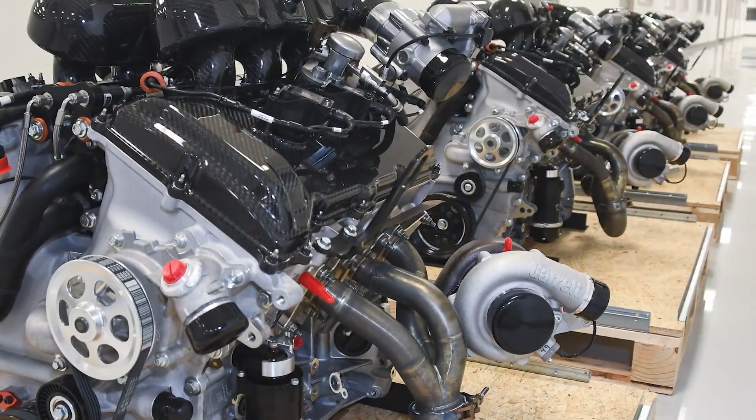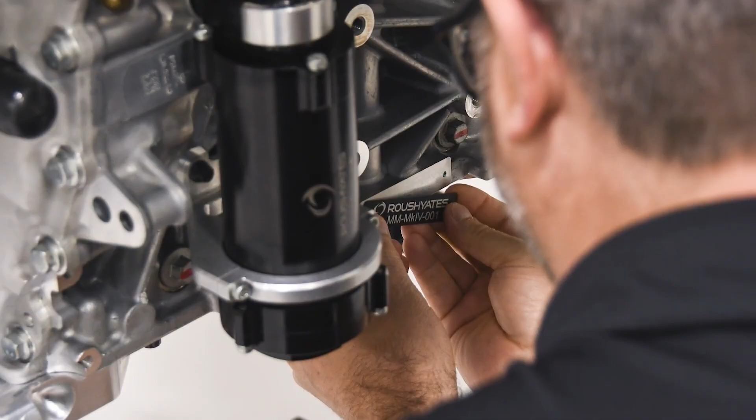Good afternoon, or good morning for some of you. My name is Todd English. I'm going to run us through the company history at Roush Yates Engines, then I'll turn it over to Jamie McNaughton. We have been partners with CONVERGE CFD software since 2016.

How did we get here? Prior to 2004, Jack Roush and Robert Yates had their own engine development companies, one located in North Carolina, one located in Michigan. Jack and Robert were like brothers, and they were brothers to Ford Motor Company. They wanted the resources, they wanted the allocation of technology, and they really battled each other on and off the racetrack for many years. At the end of 2003, with the leadership of Ford Motor Company, we understood that the business landscape was changing. Toyota was even coming. So with the encouragement of Ford, you had two legendary, iconic NASCAR Hall of Fame engine builders merge their operations at the end of 2003 and begin in 2004.

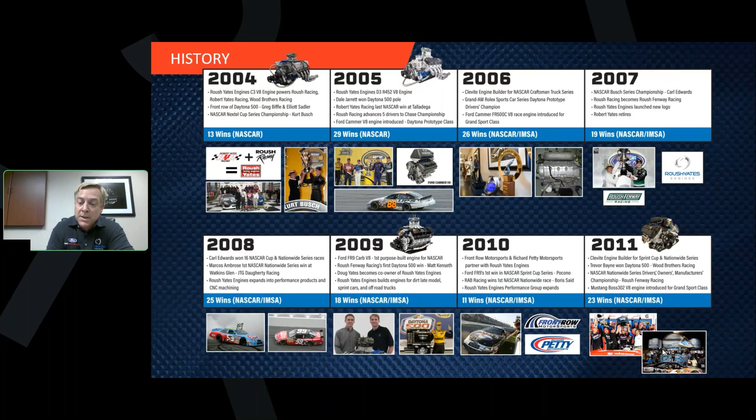When we first started the company in 2004, we had 64 employees. Today, we're about 225. Throughout the years, we started with the Cup side of the business, moved into Xfinity, moved into truck, also started building V8 engines and V6 engines for Daytona prototypes, moved into some other series. In 2010, you can see we actually started adding different teams with Front Row Motorsports and Petty in 2010 to our Cup program.

Just going through some various slides here. 2009 and 2010 was critical as well, as we introduced the Ford FR9 in 2009. That is our NASCAR Cup engine that we race today, which has obviously changed in development for many years.

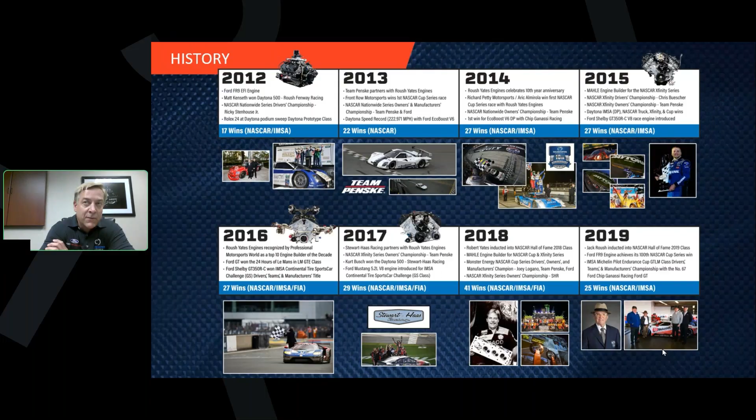Another highlight with Roush Yates Engines would be in 2016 when we partnered with Ford as well as Chip Ganassi Racing to go back and compete on one of the iconic racetracks in racing, which is Le Mans. So being able to showcase to this community, we do have various engine platforms and programs. A lot of that is dependent on Ford Motor Company and the direction that they would like to race.

Here, most recently, it's been a few really good years for us on the NASCAR Cup side with the NASCAR Next Gen program. We have won the championship in the last 3 consecutive years in '22, '23, and '24, and looking forward today, we currently have 3 NASCAR race car drivers in the championship hunt.

Just high level where we're at today from a Roush Yates Engine perspective, we do count the number of wins. You can see the NASCAR Cup Series, Xfinity, Craftsman. You can also see the WEC Series, the IMSA. Again, a long, rich history of racing in various series.

We have participated in other series such as ARCA and some other series that we do not count the wins, but again, through our long, rich development history, there's been lots of different series. I mentioned ARCA, but we also did Sprint 360s, 410s, off-road truck racing engines. So again, we have had a nice assortment of different platforms that we get to develop and test.

The vision at Roush Yates Engines is to be world-class racing engines, with a mission to design, develop, and manufacture championship engines in partnership with Ford Performance. And the core values really revolve around power, performance, and reliability.

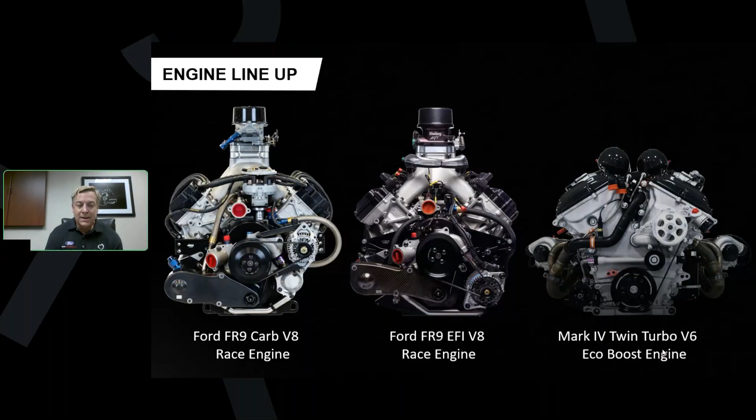Today's current lineup, that Jamie will get more details into - but today we currently race the Ford FR9 carbureted V8 in the NASCAR Xfinity Series, which has 33 races in 2025. If you look at the Ford FR9 EFI V8 engine, that engine we race in the NASCAR Cup, not only for Roush Fenway Keselowski, but we do Team Penske, Wood Brothers, Haas Factory Racing, Front Row Motorsports, and Rick Ware Racing. So there is a good amount of teams that we're powering on almost every given Sunday. And also on the Xfinity side, we do power 5 to 6 teams.

On the right-hand side is the Mark IV. We showed a little bit of this in the video itself. I'll let Jamie talk about engine development, but we did partner with Multimatic and Ford Performance on this adventure, where we leveraged the skill sets at Roush Yates Engines from design, development, and build of specialty engines in partnership with Ford Performance.

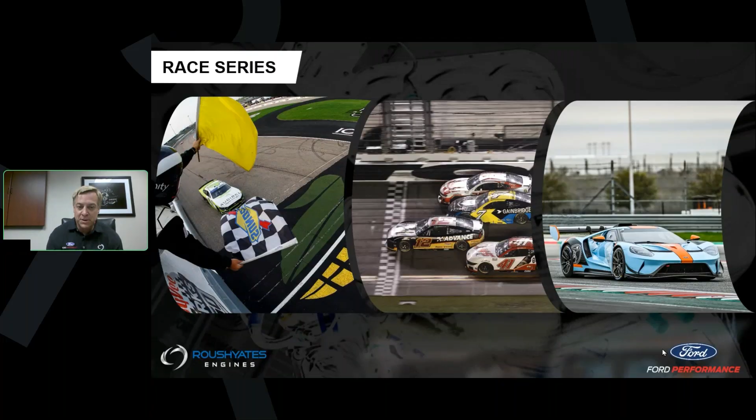Highlighting the series that we race in, starting on the left-hand side is the NASCAR Xfinity Series. The middle one is Daytona, that's the NASCAR Cup Series, winning races. It's important, but you can see how close the competition is. Then you can actually see a picture of that beautiful Mark IV car on the right-hand side.

We have 3 facilities located in Mooresville, North Carolina. The facility that we're looking at now is the NASCAR engine shop, so again, that's where all the engine design, development, and testing occurs. We do have 2 other facilities that are a support system.

We have our internal 135,000 square foot advanced manufacturing CNC facility. There, we manufacture about 60% of the internal components that go into the FR9, but we've also gone into some other areas of manufacturing and providing solutions. So not only today do we do the NASCAR engines and machine components for that, we also manufacture car components for the NASCAR Cup Series that we sell to all the teams.

And from a diversity standpoint, we have moved into various military projects. We've moved into aerospace, we moved into medical, and today we even consider space a unique category that we manufacture and provide solutions to. This is a good bird's eye view of our CNC facility.

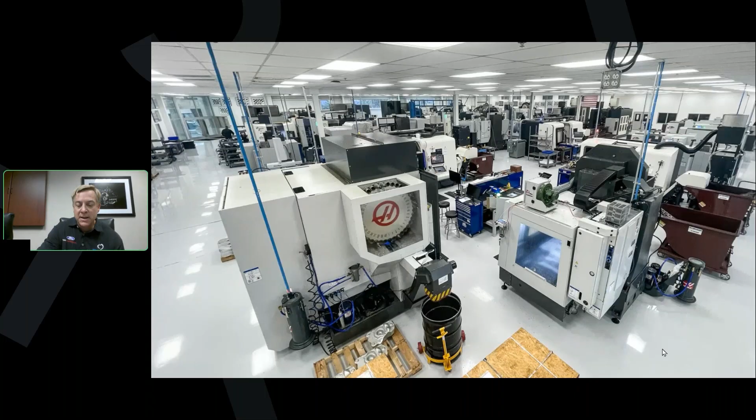Again, I think I might have mentioned, AS9100 certified, ISO 13485, 70 CNC machines. We continue to look at future investments, and future investments will be paired with some type of automation here. This is a pallet system that we have the capability of machining lights out, 36 pallet stations, tombstones there, and it's paired with 6 A61 machines.

Before I turn it over to Jamie, for us the business model really revolves around winning. Throughout our rich history we have to make the business model work, but checker flags are super important. We have over 400 checker flags located in our facility, and it's a good way for us to capture the win itself and really some great memories of the success we've had since 2004. With that, I'm going to shift to let Jamie move over and get started into a deeper dive of how we're leveraging the success of CONVERGE CFD each and every day.

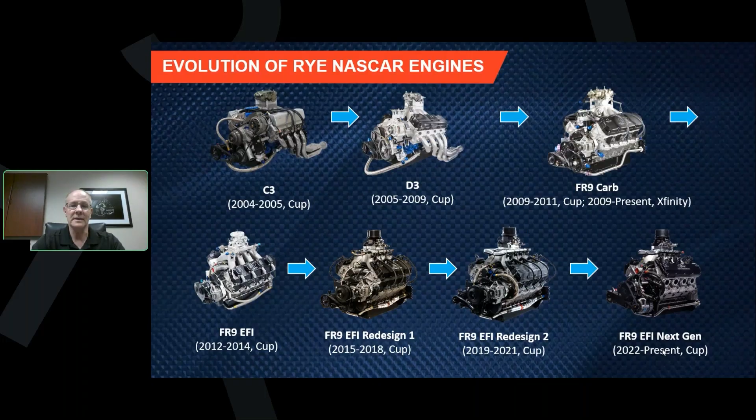These differences include anything environmentally, of course pressures, temperatures, humidities, and also some drivers drive a little bit differently than others. So some of the dynamics of driver style need to be taken into account. As a result, we will make dynamic modifications to some of the systems to ensure that we're not going to have any issues with any specific drivers, but yet not losing performance associated with those limits that could be set maybe a little bit differently for more aggressive drivers. We still need to make sure that everyone is going to have a reliable powertrain out there independent of their driving style.

So anything that takes place at the track, we need to simulate here. We conduct a lot of performance testing as well as validation of durability requirements. We have tracks that are really short tracks, and tracks that are really long tracks. Understanding all of those tracks and the types of powertrains that are raced at those becomes really key to us to be able to develop powertrains to the best of their capabilities.

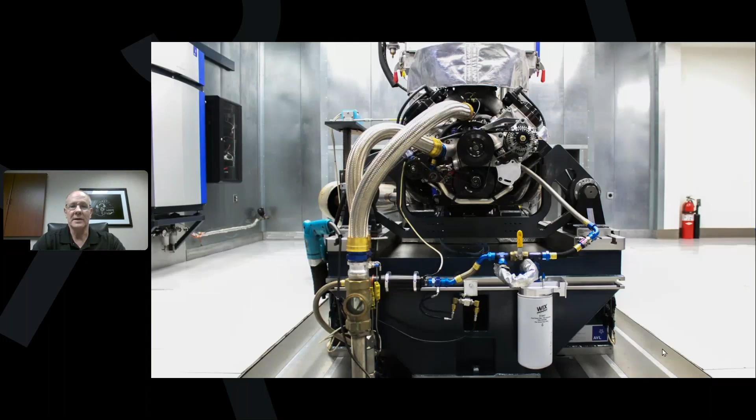An example of our mounting in the test cells that we have. One of the important things is making sure this is exactly as it is in the vehicle. Sometimes you'll get feedback from the vehicle on engine mounting locations as well as temperatures under the hood. All of these structurally need to be identified, and make sure you're replicating those in your test cell as well.

Some of that work we do is learning, and how do we give back? We give back to ourselves by improving engine performance and efficiencies, but we also give back to Ford Motor Company and other projects that are maybe not quite out to the level of refinement we are on our Cup engines, but there's still a lot of learning that can be handed back to production-based powertrains.

A lot of those learnings on the 3.5/3.8 liter track day supercars was knowledge transfer from work that we did on the Cup side. And as a result, that powertrain is a really good package. We'll talk about that a little bit more. But great overall transparency between the race side and giving back to production.

So on the design and development activity on our powertrains, what does a NASCAR engine really consist of? About 650 unique parts. And where do we get all these parts? Well, 1% of them are OEM supplied per the rules. We need to have blocks, castings, heads, castings, induction manifolds, and we also have a water manifold casting that comes from them. So out of the 650, we get these castings from Ford, and then we do pretty much everything else to design, machine, develop, and test for each one of our specs.

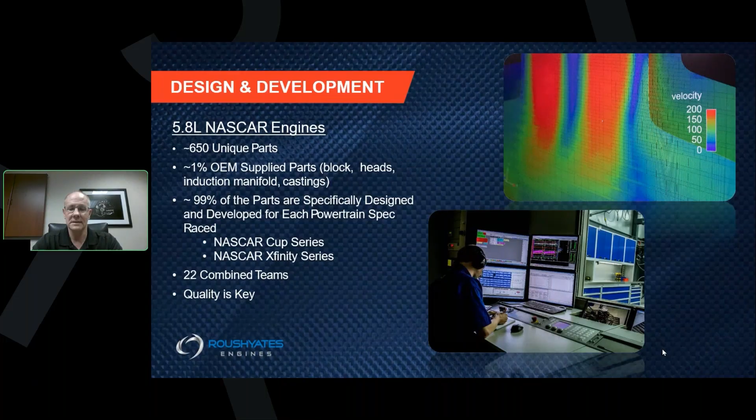Our development testing on our dynamic test cells - we talked about that a little bit. How much do you really have to find? On the development activity, you'll be lucky to find, let's say, a 1% increase in power over an entire year of development testing. That's how close we are. So for a 670 horsepower application, that's about 7 horsepower you're going to find over the year. That's an awful lot of testing for very small gains that need to be found.

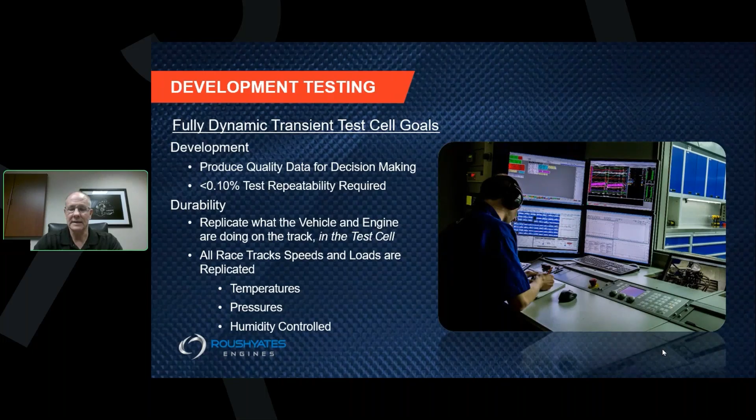As a result of measuring those gains, you have to have very accurate test cell repeatability to ensure you're making decisions for the right reasons - at 0.1%. You say, how can you do that, right? We need to ensure that data, processes, and people are the best that they can be, and also understand what it takes to design, develop, test, and review data for these types of powertrains and the testing occurring. Our durability testing replicates everything that takes place on the track in our test cells - temperatures, pressures, humidity, as well as the type of drivers that are operating our cars.

On the assembly and testing side, we build about 800 engines a year, and all of those engines are tested before they go out to the track. So what does that really mean? Every time a car goes out, we review data post-race, and it returns to the track thoroughly inspected.

A question might come up: how many times are these powertrains raced between complete rebuilds? It's 2, 3, sometimes 4 races before they are completely torn down again. But that's a function of the type of races it's going to, and if there are any issues with some of the events that may put a question mark into the quality of the powertrain. You can't go into it as far as we'd like because of the rules. There's a lot of data, post-processing, and learning that needs to take place regarding integrity and durability of the powertrain.

So a lot of those engines, you can see in the upper left-hand corner how those are transferred to the teams as well. Each one is performance tested, ensuring that we're delivering quality engines to them.

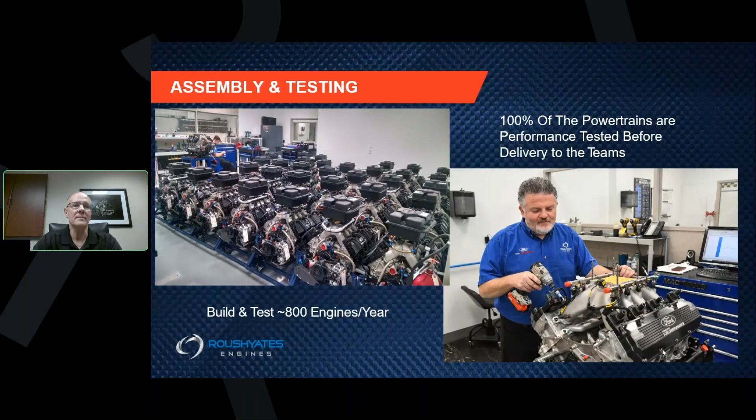When we're at the track, what really takes place? We have practices, we have qualifying sessions, and sometimes there's not a whole lot of time to make assessments on data before we go to the race. So a lot of data comes off the cars, and we have to evaluate it very quickly. We need to look at the data to see if we're close to where we think we are for fuel economy predictions, and where we're at with drivability.

A lot of that assessment comes directly from the drivers. Do we have any corner exit performance not quite as smooth as you'd like? Are there any changes or data that don't line up the way we think it should, and could be a contributor to that? And then also, how does the engine feel? Power delivery, making sure it's nice and smooth coming out of the corners where you're grip limited everywhere, while the driver does everything they can to get the car around the track as quickly as possible. In areas where you're grip limited, it's really important that we're delivering good, clean, predictable power as well.

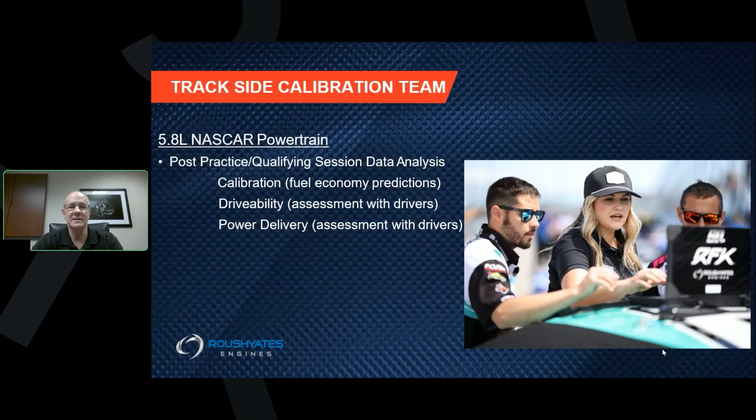That covers the high level on the engine development side. Why don't we transfer over to my design and analysis manager, Brad Tillich. He's been at Roush Yates for almost 2 years now, and he's been doing engine simulation for about 25 years. A lot of activity takes place on the simulation side before we actually make parts. There's a lot of benefits to that, and Brad will talk about those more, but the more we can simulate up front with software packages like CONVERGE, the less parts we have to make, the less tests we have to do, and the faster we can turn around good designs and hopefully get to the track faster with an advantage, as better products will come from this development and simulation activity.

So here is Brad. All right, thank you. Yeah, as Jamie said, Brad Tillich, simulation manager here at Roush Yates. I'll take some time here to describe what my group does and how we use CONVERGE in the engine development process.

First and foremost, we build, correlate, and validate 1D, 3D, and coupled models. We continually validate these models. Accuracy is everything for us. We will correlate a model to 24 high-speed pressure signals: 8 intake runners, 8 exhaust header pipes, and 8 in-cylinder pressure data sensors. We need the model to match the test, and match the test for the right reasons. We'll often try to find a couple horsepower out of 700 in an already refined engine. We want every cylinder to behave correctly for the right reasons over the RPM range.

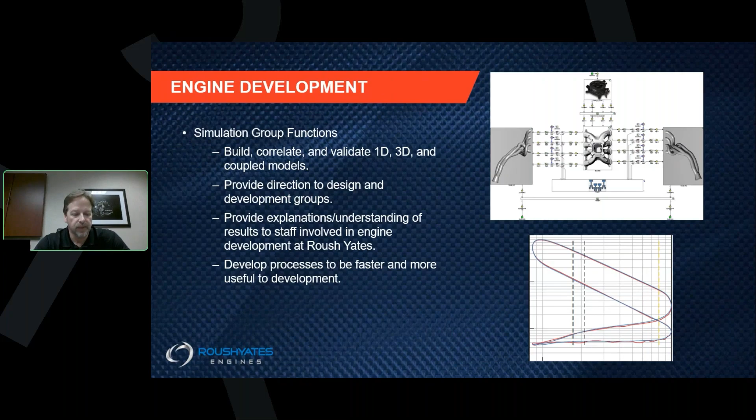We'll talk about a few different sections here. We have gas exchange, intake manifold, intake system, and exhaust headers. Thank you.

With gas exchange, with CONVERGE, Roush Yates has been able to obtain a much clearer understanding of the gas exchange process.

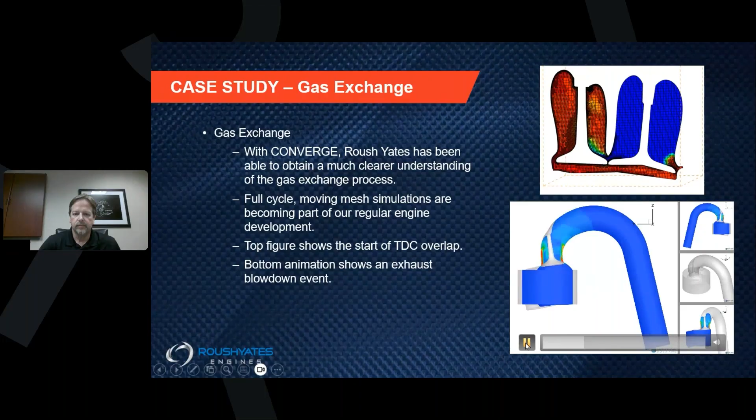Of course, we do full cycle moving mesh simulations for the whole cylinder, but just for the demonstration here, we're showing an exhaust blowdown event. So we can make videos like this for a good understanding of what's happening. But more importantly, we can take cross sections throughout the exhaust ports, throughout the tailpipes. And that is actually what is used by the designers and developers to come up with the next design.

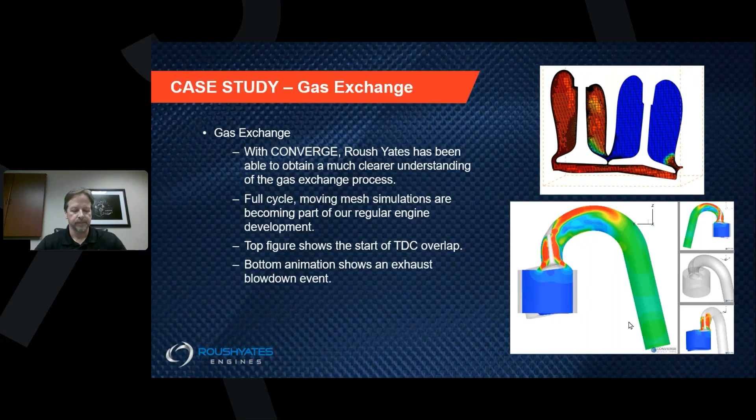We have a restrictor plate that sits, looks like this. This is what limits the performance of our engines. It sits on top of the manifolds and will result in 4 jets. And at the high engine speeds, high power conditions, we do have more than 250 meters per second going through those holes and hitting the manifold floor.

All the cylinders are highly coupled. Changes to one runner can significantly affect another runner. And fuel is everywhere. Unfortunately, we can't completely inject during valve open periods for best performance. So we have fuel in the manifold, fuel that goes from runner to runner, and it's something that mapping and calibration people have to deal with. And it's very important to optimize for both flow and tuning.

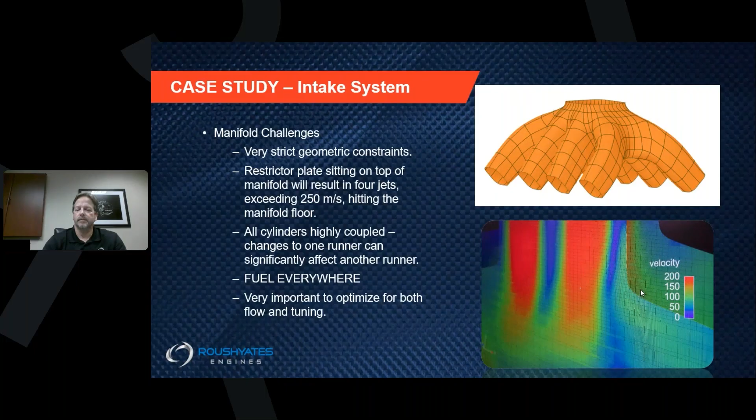Just another figure showing the complication of the intake manifold - very large pressure amplitude waves in all of our runners, and of course they all combine in the common plenum manifold. We have all of these interactions, and we have all the fuel and the jets, and we have to somehow capture that as best we can. In many cases with 1D, but then of course in some cases we have to bring in 3D in order to get to the accuracy level that we need.

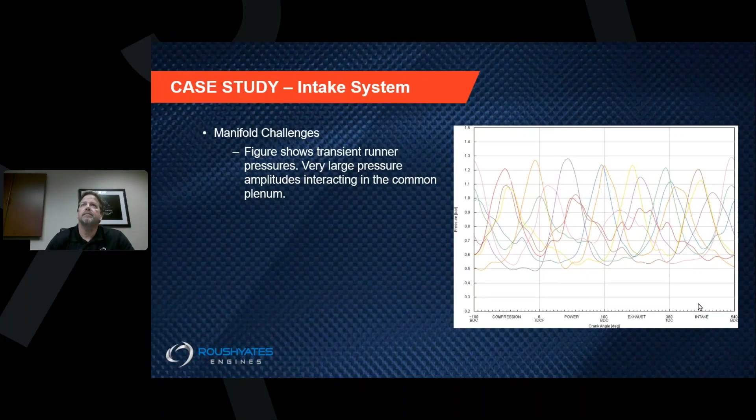1D is very good at most of what we need to do, even on the intake side, but we do need CONVERGE to close the loop. We are looking for manifold deltas. We come up with a new manifold design. We are looking for deltas that are on the order of 0.25% to 0.5%. And of course, we make sure we don't point developers or designers to the wrong direction.

Figures there show the performance deltas for 4 cylinders from a manifold swap. If you can't quite see the scale, it's about plus or minus 0.5 horsepower for each of those cylinders. So it is in that 0.5, 0.6% that you see. And then we have kind of a representative port pressure comparison, test versus simulated pressure, down at the bottom. Not every runner, every port, every speed looks this good, and so that's where we bring in CONVERGE.

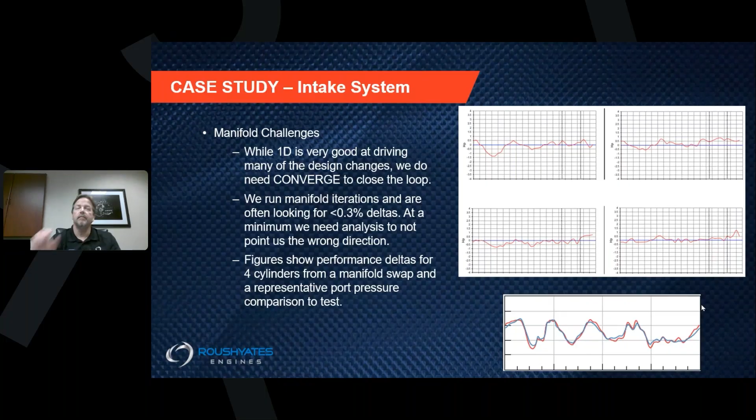On the intake system, we use CONVERGE to simulate steady flow conditions. That's one of the things we do. So the CFD domain in one of our examples here goes from the restrictor inlet through the cylinder and replicates one of our flow bench setups. We have other flow bench setups, but we of course try to characterize the full intake system if we can. CONVERGE allows us to match flow bench data very closely and gives us clear views of velocity distributions at the entrance and throughout each runner.

So we do get a number. We can be predictive with that number with CONVERGE, which is very important so that we don't have to prototype and test all of these on the bench every time. And most importantly, we do get these velocity cross sections, which is what we use, and that's what the designers use to make the next iteration.

We can use this process. We get a new design, we evaluate in steady flow CFD, and then we evaluate in fully coupled 1D, 3D models, which we now have processes in place to do in just a day or two each. These are kind of fully coupled multi-cycle analysis of manifolds.

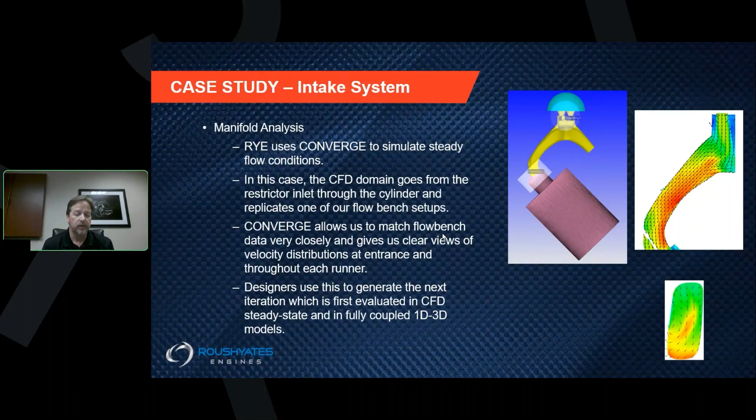Moving on to exhaust headers. As with the intake system, 1D can handle much of what we need for the exhaust system. You do see a CFD result here for our Xfinity exhaust system. We have, as Jamie mentioned, two different series. We have a NASCAR Cup series, and in that case, it is a completely separate exhaust that leaves on opposite sides of the car. The Xfinity exhaust that you see here, at least part of it, crosses underneath and exits out one side.

These again are good for demonstration, but the most important thing is that CFD gives us more accurate high-speed pressure prediction at the exhaust ports. So that timing on the intake side and the exhaust side, the use of CFD is primarily to make those predictions better, because once those predictions are better, we can have better confidence in the model, and of course better confidence in valve selections, and whenever we deviate from the baseline model that we calibrate.

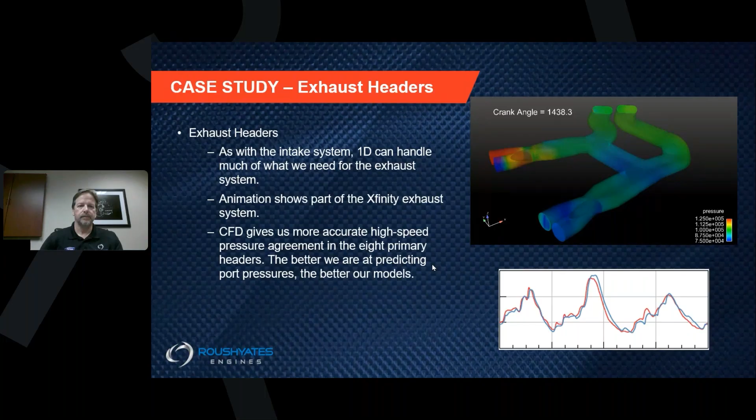There are some components which are complicated and difficult for 1D to fully capture on its own. We use CONVERGE to better characterize these, and as an example here on the right, you see some collectors in our exhaust system. You can kind of see that the behavior of the collectors changes quite a bit based on what's happening at a particular time in the cycle. So this is something that's difficult for 1D to capture.

Other things we can use CONVERGE for in steady flow are multiple consecutive bends. It's hard - GT does do bend losses, but when you have consecutive bends arranged at weird angles, the bend loss calculation is not accurate. So we can characterize these sections of the exhaust better with CFD.

So we have a header design process: 1D DOE simulations with MLP models for weighted optimization. This is a case where we run 1D models, thousands of cases at each speed. We do the weighted optimization to find the performance we want for a particular race or torque curve shape. We can then take that to a 1D-3D coupling for a final check, and then move on to build and test if everything still holds up.

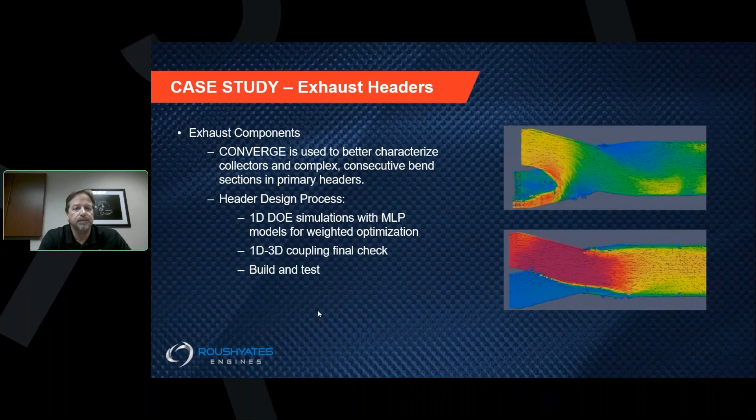So, the future of simulation for Roush Yates. First bullet point: we're more or less doing routine coupling for manifolds and headers now. We will continue to do that and use CONVERGE again to get better prediction of port, intake port, and exhaust port pressure predictions at all speeds, all cylinders.

There's probably room in the future, or value in the future, for being able to provide better information for calibration - part load operation calibration, track specific information, race day conditions. This would of course be valuable to Roush Yates as well.

You can imagine during a NASCAR season there are large fluctuations in temperature. There can be large fluctuations in pressure, like this past season when NASCAR Cup Series went to Mexico City at 7,000 feet altitude - that was a calibration challenge. And of course there are some tracks where we could give information to. There are tracks that provide no kind of ram boosting effect on the engine, and there are tracks where we get a lot of that.

Combustion optimization - we do this some, and we'll probably continue to do this in the future: gas exchange, in-cylinder mixture motion, chamber design and combustion. And transients - we don't do a lot of transients now, but high-speed throttle transients to aid with engine transient calibration. If we're somehow able to help with transient fueling effects, transient AFR with throttle transients up and down, that would be very valuable to our team here.

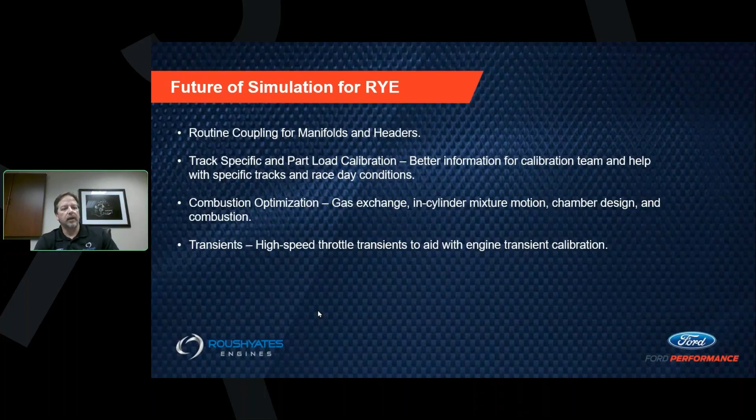The 2026 look ahead with CONVERGE: Roush Yates and our Ford NASCAR partnership will enjoy the continuation of our relationship with CONVERGE to refine our engines, improving power and efficiency in the coming years.